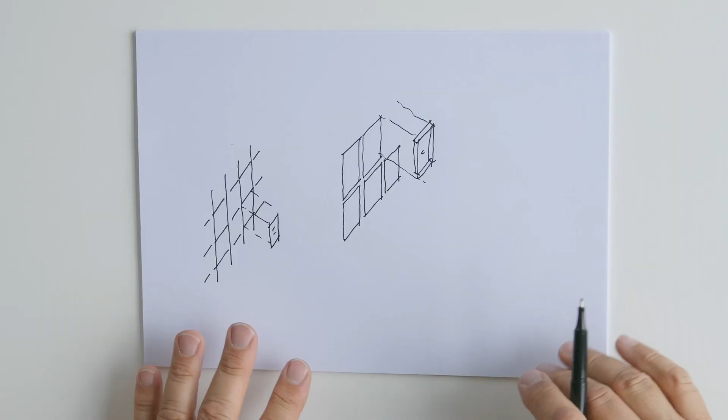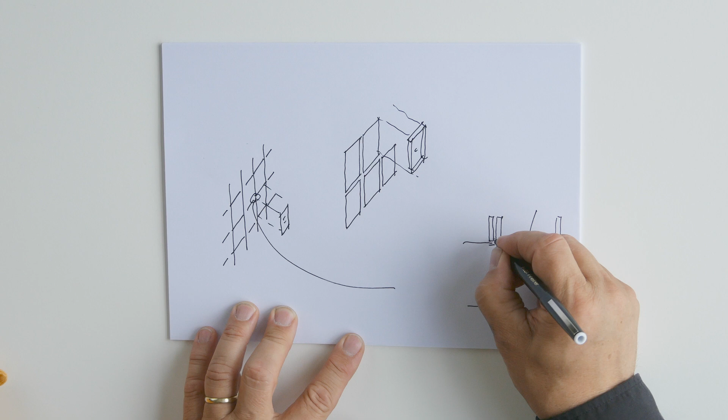So if you go for the normal stick system detail, which we already know, it's a standard. So yeah, here we go. And then glass, fixed, cover cap, screw. If you go for a unitized system, what do they do? Yeah, they cut the mullion and the transom in half to create a frame with the left or right side member. That becomes the unit. So this is like a box. One unit, precisely, this kind of box, and this is the next one. And then this has to be sealed. So we have 1, 2, 3 layers of sealant which are brought in position.

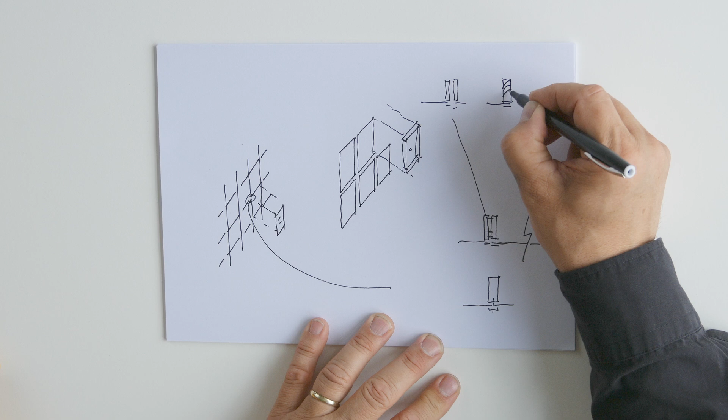We saw that in aluminium, wood and steel. We are aware of, say, an aluminium version, like this. But we are also aware of, let's say, a wood version of this, which means this is actually made out of wood. Yeah, and they also have these little interlock gaskets to connect to each other so that you're also able to create these 3 layers of defense, moisture, airtightness.

So, stick system versus unitized system. Unitized system is often used if you have a lot of the same elements, and then you can speed up the process because you already have everything installed. It often also increases the quality. It's a logistics issue, you have to make sure that you can hoist them into place. Wind is an issue, but often it's the better solution whenever you have high rises, for instance.

Now, alternative, somehow I wanted more free form in the facade. So I can imagine a stick system, and so you twist it or bend it. Somehow I make it 3-dimensional, like this. So it really gets a free form shape of the building. So maybe this goes through, and this may find a geometry like this. And the consequence, this is kind of bouncing out. We show a couple of pictures of facades.

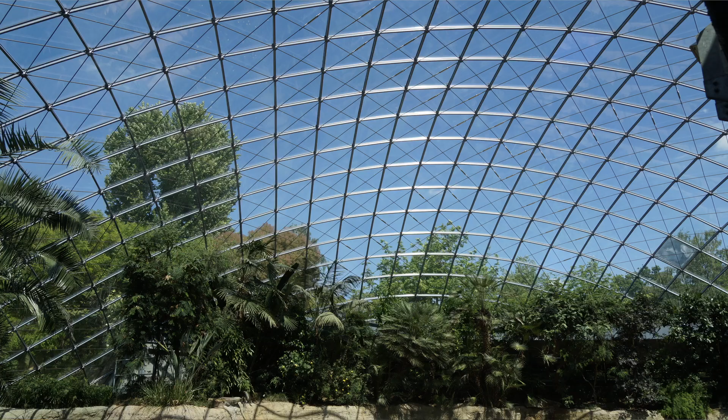So, again, this standard detail. And now I'm trying to draw this 3-dimensionally. So we have the facade stick system. We see this being the normal intersection as we saw it in the showrooms.

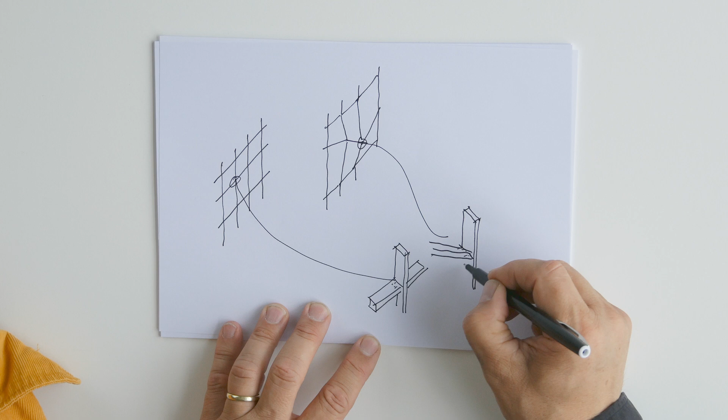And now this one needs to be 3-dimensional. So we either have the solution of using a stick system and whatever kind of wild angle something cutting into, which means it has to have a different interface in here. System-wise it's kind of like compound miter angles. Yeah. It's a tricky part.

You have to know exactly the geometry, and then you cut them under 74 point whatsoever degrees, and then you have to put these together. It's tricky. As long as the system allows you to have certain angles. Precisely. If it gets super sharp, if it gets not only in one line but in the other geometry as well, forget about it. Then you may end up, oops, and that's now a complex one.

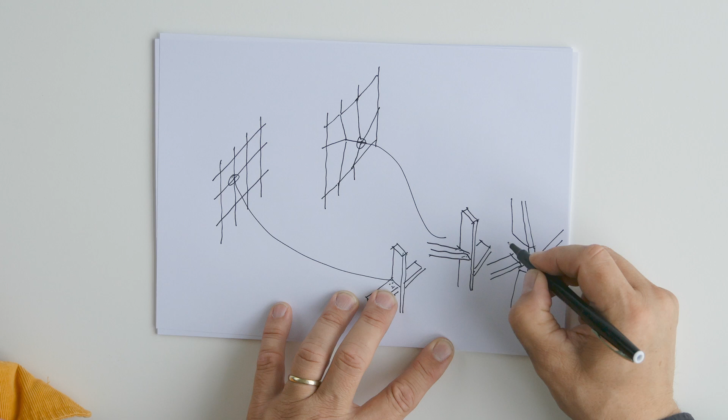So let's see if I can draw this directly as a sketch. If you would end up with a node. Yeah, and then with a node. So if you would be able to cut rectangular here, making it even more complex to have another one here, we may need to find a solution to get this as one geometry node solved. So it's one node. That node connects perfectly 90 degrees straight cut standard profiles, and the complexity of the geometry is solved within the node. That's the idea.

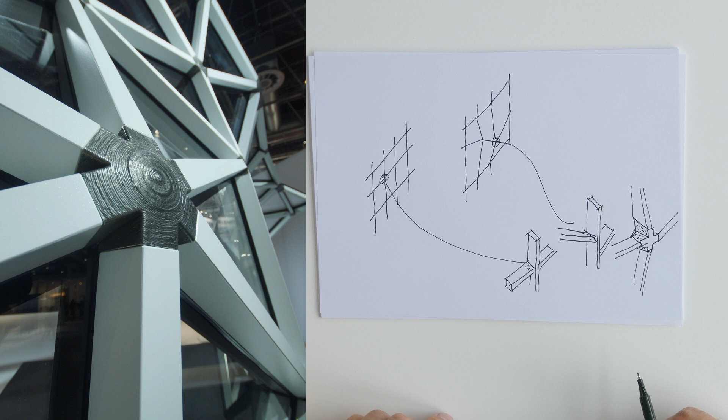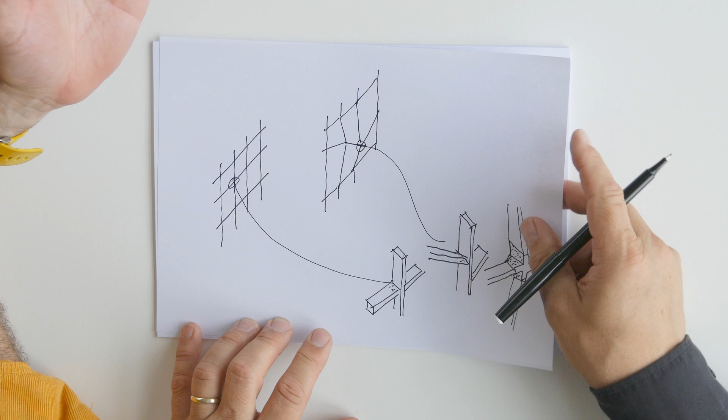And that's an interesting one. Again, we're going to show some pictures here of opportunities of technical solutions. And it's either a 3D printed or out of the solid piece solution. So additive manufacturing in this case makes sense because each of the different nodes are different. Yes, that's the point, the beauty of the system, because the 3D printer can print all of the individual parts with the same ease, let's say.

Now, final topic we'd like to address in this one. We again come with our stick system. And again, if I draw it two-dimensional, I'm aware of this having a certain dimension, like this. Yeah, that's the normal stick system we already had for a few weeks now. And if I'm now placing glass in front of it, this is still the 50 mil, which is blind. I can't see this.

So do I need a stick system, or can I think of a pure glass structure, having glass plates in the size I'd like to have them in position? So the structural use of glass. Structural use of glass. So glass actually takes down the loads, but horizontal loads need to be taken care of as well. So we somehow need some kind of substructure at the back, which we may want if we want to stay in glass and have full transparency.

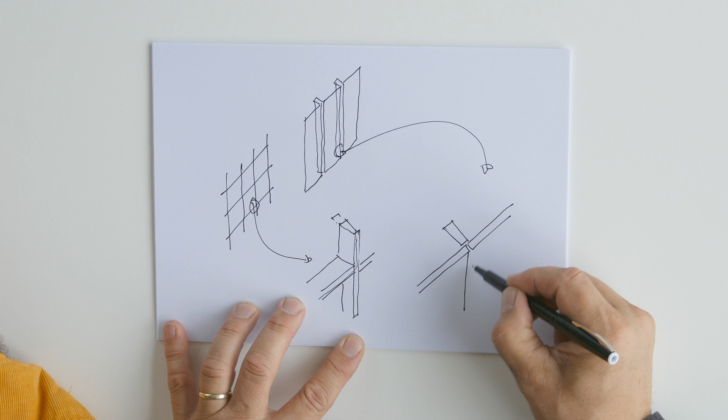So if this is this detail, we may go to such a detail like here, and I may end up in, okay, I add a beam out of glass at the back, like this, and then this beam may be 3 layers out of glass, laminated glass, and then this may be sealed or fixed with a hidden screw. Why do you use 3 layers of glass? 3 layers of glass. Interesting question.

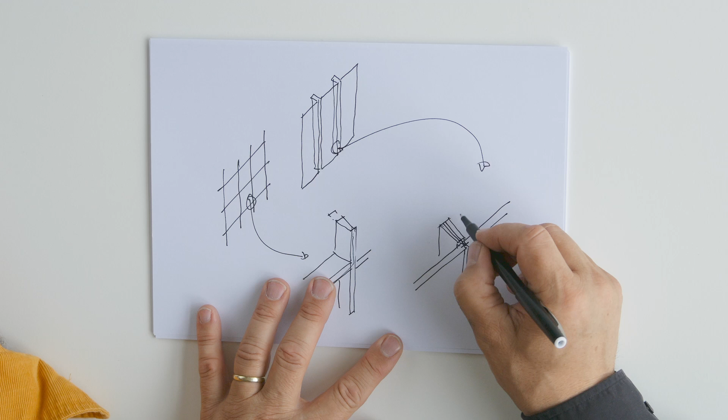So when we look at this setup, this normally is also some kind of laminated safety glass. So if one breaks, the other one doesn't fail. It's a safety effect, and that's the same here. So we have 3 layers. If the one side fails and the other side fails, the inner one, entirely covered, still stays in position. It's in principle the same like glass stairs. Yeah, same like glass stairs.

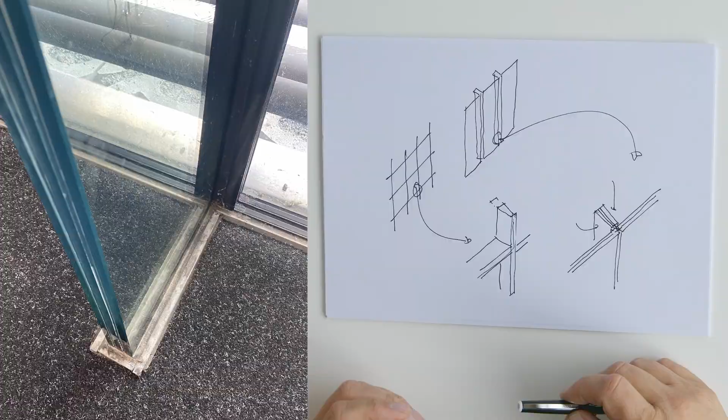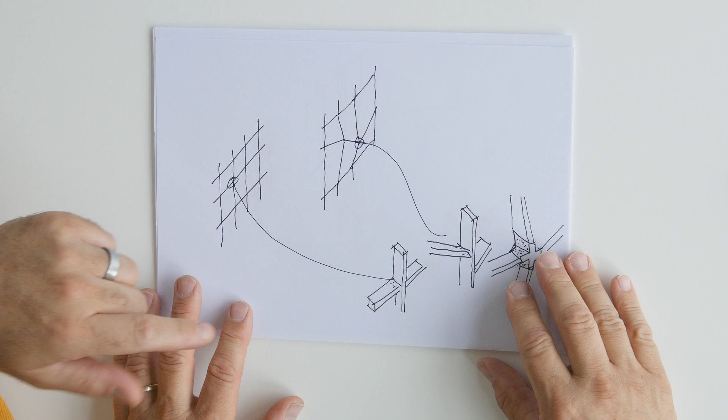So, alternative solution for our system in glass, alternative solution in free-form geometry, either milled or 3D printed. Just to make sure, this is a complex development of the last couple of years. We've seen many PhDs also within our institute and colleagues of ours. So just be aware, this was a very quick explanation and a lot of things to be taken care of. And then there's an alternative which mainly is related to logistics or site construction, getting into unitized systems versus stick systems.

Perfect. This is it. Great. Check.